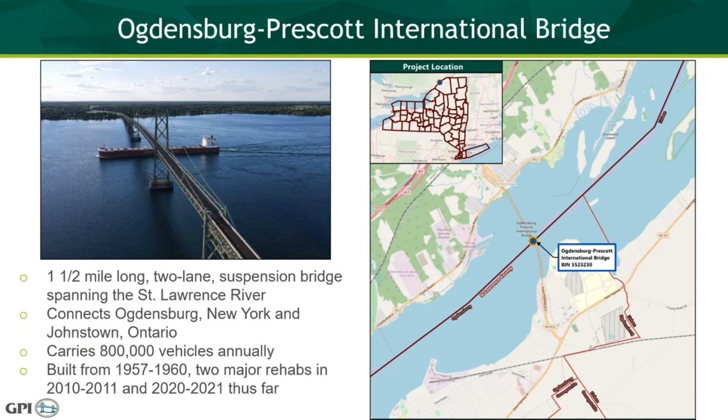On the New York side, it connects into New York 37, which will take you to Massena, or down eventually to Watertown and to Interstate 81 and the rest of the United States. It was built from 1957 to 1960, and it's had two major rehabs thus far, which were done in 2010-2011 and 2020-2021.

So a little more overview on the bridge. Overall length is 7,383 feet. There's 2,179 feet of deck girder spans, and there's 17 of those in total. There's 3,054 feet of deck truss spans, over 12 spans.

And the suspension main span is 1,150 feet in the center span with two 500-foot back spans. The towers that you would drive through when you're going across the bridge are 248 feet tall, and the vertical clearance over the shipping channel is 125 feet.

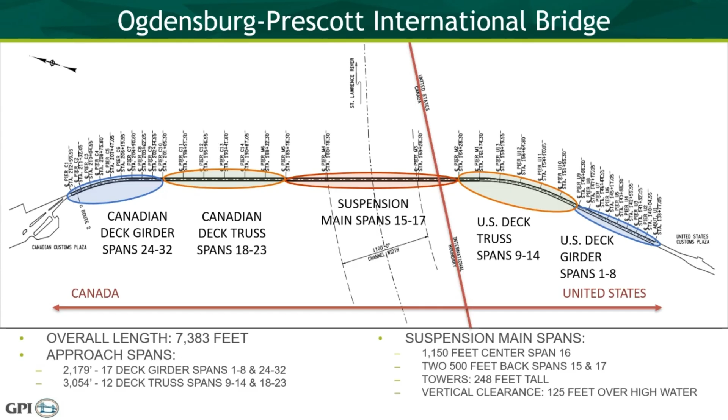So a little bit about the previous projects, because it kind of ties into how we got to where we are today. So rehab number one was done in 2010, 2011. This involved the suspension spans receiving new galvanized deck and steel stringers. We upgraded the railing and electrical across the entire bridge.

And at that time, we lowered the speed limit from 35 miles an hour to 25 miles an hour. But that was only done on the bridge. So the land approaches retained their 35 miles per hour that they've had since 1960.

For rehab number two in 2020, 2021, we did the span 1 through 8 plate girder and floor beam repairs. We also repainted the plate girders and cross framing. And spans 9 to 14 received new galvanized deck and steel floor beams. And those floor beams were installed onto the existing steel truss.

So those two previous projects paved the way for rehab number 3, which is the 2025-2026 project that we're going to talk about now. So for the bridge part of this project, it's going to be truss span painting rehab. So we're going to be looking at repainting the U.S. deck truss spans 9 to 14.

The steel trusses and cross framing will begin repainting at span 9. And we currently have funding to cover spans 9 through 11. And the hopes are that we'll be able to find additional funding to continue the work on spans 12 to 14 while we have the same contractor involved. There are some efficiencies when we can do more spans as one project, obviously, from a mobilization and materials standpoint, especially with the protection that you'll see on subsequent slides here.

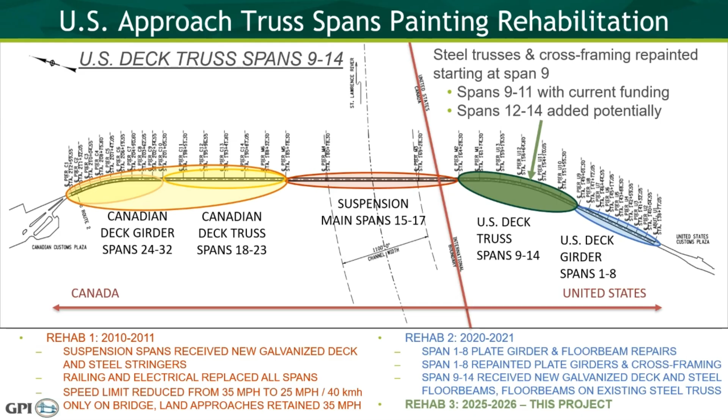So as a lot of this is kind of continuing the paint rehab that we did on spans 1 through 8, I wanted to kind of highlight how we got the painting redone on those spans, because we actually have actual photos from the 2020-2021 project.

So for that project, it started out with installing traffic signals to create a single lane alternating traffic. We really never had major issues with huge traffic tie-ups during that project. Kept traffic flowing pretty good. So we're going to use the same approach here.

Then they installed roadway containment, which is the black tarps you see on top of the steel open grid deck. Part of the reason why we have to do that is we're going to draw a vacuum in order to contain the grit that's being used to take the paint off. And so we don't want the grit coming up into the vehicle traffic above.

At that point, then they started installing the work platform, which you can see on the photo on the right. And you can see some of the tie-ups going across the plate girder members. Take note of the rust that was showing on the plate girders at that time. The coating system was the original coatings from 1957 to 1960.

And after 60 years, that paint has long outlived its expected life cycle. Typically, structural steel paint is usually thought to last anywhere from 20 to 30 years at most, and then you'll start seeing it deteriorate. And in this case, you could see it was starting to come off in larger areas at this point.

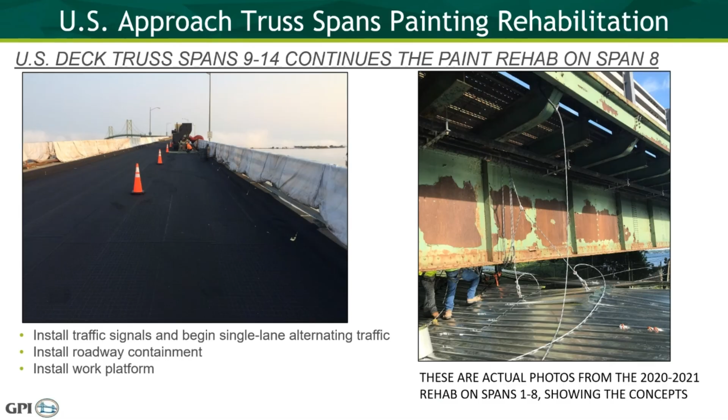Over on this slide here, you can see that here's more of the decks. This was a SafeSpan system, but there's some various systems out there that are very similar, with steel wire rope attaching it to the steel above, the floor beams above. On the right, you can see we have the sidewall containment tarps now in place. That allows us to draw the vacuum and start doing the blast cleaning.

In the photo on the right, you can see some of the grit from blast cleaning on the actual SafeSpan that hasn't been vacuumed up yet. You'll notice that the steel has been primed at this point. That nice kind of silvery gray is the color of a lot of the primers. We typically prime and then go back through and determine steel repairs. That way we don't get flash rust occurring on our newly cleaned surfaces.

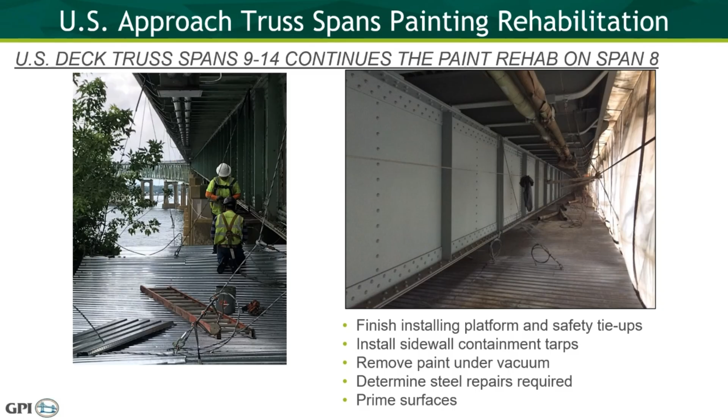So now once they've determined the steel repairs and they've taken measurements and sent those off to fabrication, they will go ahead and start doing the intermediate and finish coat. So the intermediate coat, which I don't have a picture of here, is usually a very contrasting dark color. And then our finish coat in this case was sage green, which you see on a lot of bridges throughout New York State. Some regions will also throw in some blues and reds, but usually the finish coat is something that's very striking and easy to see both in daytime and at night.

At this point, they would remove the sidewall containment tarps and install the steel repairs where required. You'll notice on the photo on the right, we did a fair number of floor beam repairs where they did some fish plating, where they take angles and plates and they replace the section that was lost in the web and flange. There were also some places where we did steel repairs such as these connection plates or gusset plates.

Again, everything is fabricated to fit, matching the existing holes. Plates are made in the shop, they're galvanized, and then brought out to the site. So everything that's new that we're putting on the bridge is galvanized at this point. And that's to give us a much superior lifespan than structural steel painting by itself.

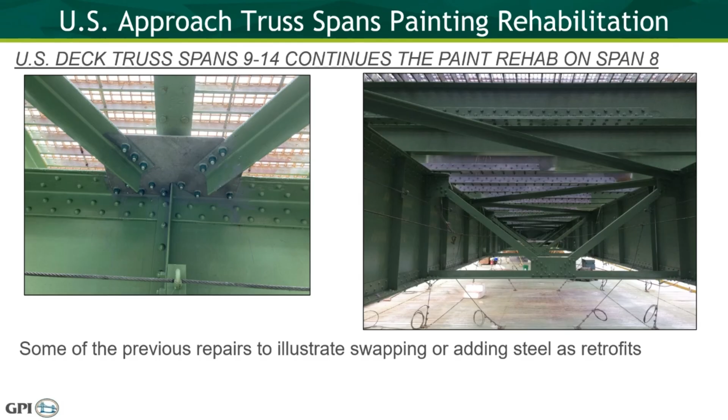So, much of what you're going to see in the truss spans, obviously we're showing pictures of the plate girder here, but it's going to be kind of the same idea, only substitute the plate girders for the actual truss members, but it's the same concept. The only thing we won't have to do this time around is the floor beams because they're all brand new galvanized steel from 4 years ago. So that talks about the painting part of this project.

If you've driven across this bridge, you'll know that when you get up to the deck truss spans, it's a nice shiny gray all the way across the suspension span. So you can tell when you're driving across this which spans we've replaced the deck so far. The eventual goal in subsequent projects is to replace all of the deck with the galvanized deck that you see in the middle spans at this point. But we are probably several projects away from reaching that.

But for the paving rehab, what we're going to be doing is repaving everything from the U.S. abutment to Proctor Ave. We're going to be going all the way down through all the lanes in and out of U.S. Customs. We'll also be hitting pretty much everything except for the concrete slabs at Customs and the toll plaza. We'll be doing full depth and partial depth rehabilitations depending on the existing condition.

We'll be using a similar traffic control scheme of single lane closures so that we can keep traffic moving through. When we get down to Customs, we'll be taking single lanes, and we may be shifting traffic into different bays of the Customs facility as needed to facilitate construction, and then moving them back as we go across. But at no time will there be full roadway closures.

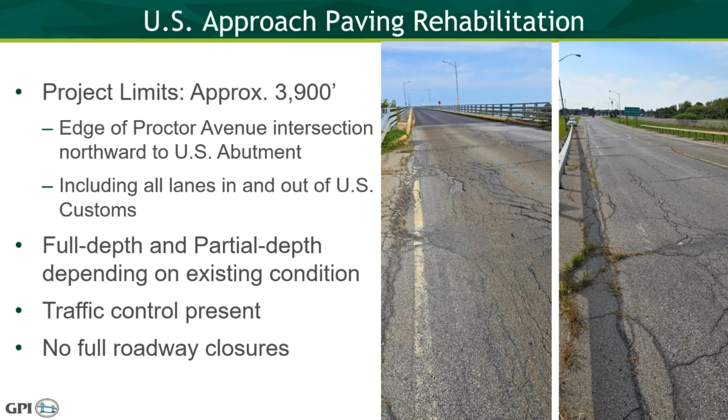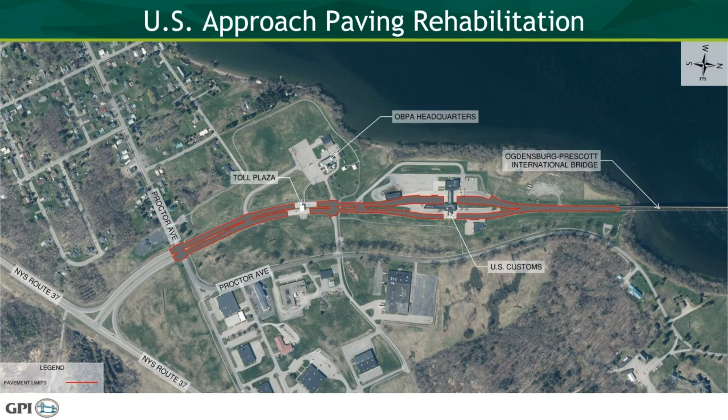The other thing we want to point out to everybody is there will be a posted speed limit change. So we're going to be extending the 25-mile-per-hour and 40-kilometer-per-hour signs down all the way from the U.S. abutment to Proctor Avenue. We're doing this for a couple reasons, but it's mostly in the interest of safety to the traveling public, but also to the OBPA and U.S. Customs staff. Once you pass through, past the Customs building, you're in kind of what they call a protected zone between the U.S. Customs and the Canadian Customs building.

And the idea of this is that now we'll have a consistent posted speed throughout all of OBPA's maintained roadway. And it turns out that if you do the math, it only adds a half a minute of travel time to go the 3/4 of a mile at 25 versus the 35 that's there today. So the plan is that these signs will be included in the project and they'll be installed during paving operations.

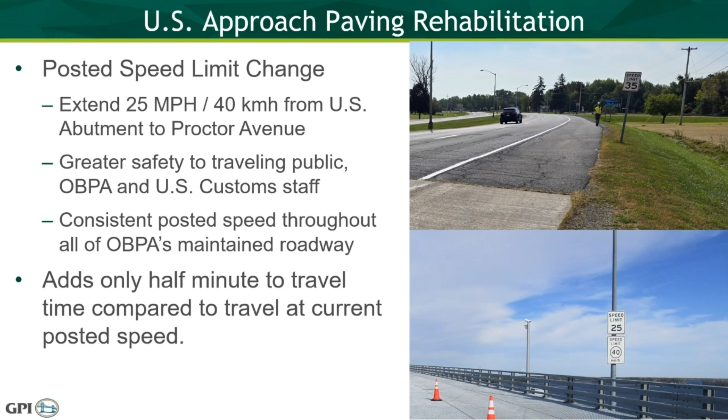So now tentative schedule and preliminary costs. So, after tonight's meeting, we're going to be looking to move towards design approval in late March 2025. That'll be going on simultaneously for the paving and painting projects, with the idea of seeking construction approval by sometime in July of this year.

Now, we're going to intentionally advertise and bid the paving project a month earlier than the paint. That's going to allow us to capture any of the money that's not used for the paving back over to the painting project, with the idea that the paving will hopefully be able to be done between September and November this year. And we have an anticipated cost currently for the total project for paving of $3,171,000.

On the painting side, we will then look to advertise that and bid it in September of 2025, with the idea that the painting will occur in the construction season of 2026. So basically it'll mostly fall within that April to September range, trying to stay away from the cold nights as much as possible. So we want to be in and out before we get into a situation where paint could freeze during the overnight. The current estimate total cost is just over $10 million for spans 9 through 11.

And for each additional span, we're looking to find about $3.2 million. So if we can come up with about another $10 million, we'd be able to do all 6 spans at once under one contract. Time will tell if the state or the feds are able to identify additional funding sources to help out with that.

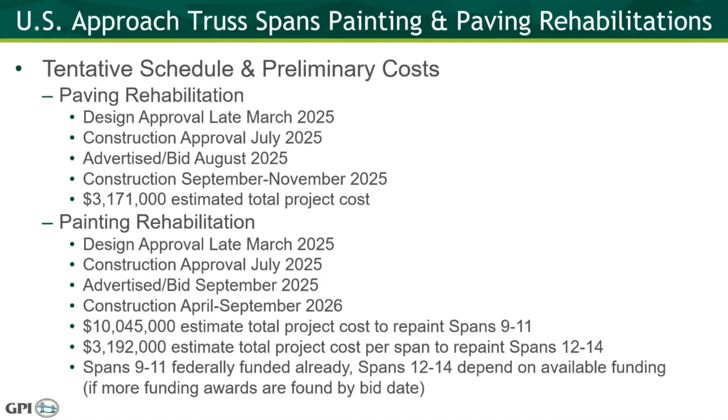So with that, we'll open this up now to questions. Written comments can be submitted in various formats. There will be a link on the OBPA's website. You can obviously send it to OBPA that way. Or you can also email me, Daniel Thomas, at dthomas@gpinet.com. And obviously, we'll also take any questions that people have this evening.

And I don't know, Joe, if you've seen any so far that you want us to talk about. There has not been any. Okay. We'll give people a couple minutes here, see if they type anything in. While we're waiting for any questions or comments that come in here, if anybody else also wants to touch on anything I may not have covered, feel free to jump in. Don't think we're gonna get any questions, Dan. Looks pretty quiet. Yeah.